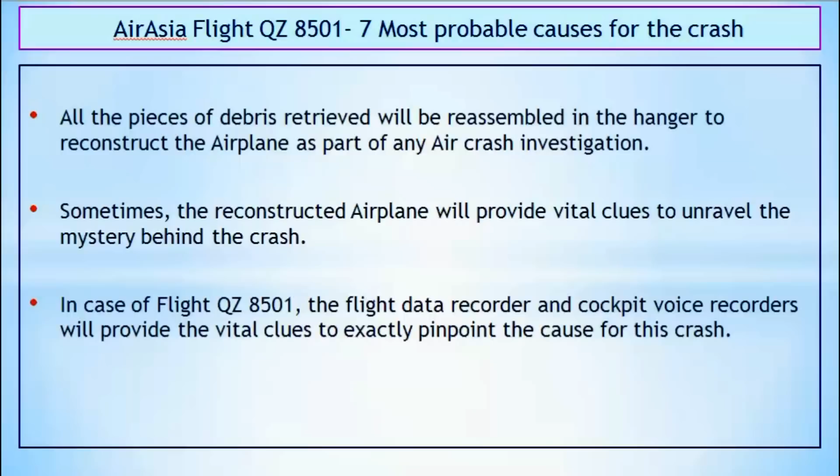All the pieces of debris retrieved will be reassembled in the hangar to reconstruct the airplane as part of any air crash investigation. Sometimes the reconstructed airplane provides vital clues to unravel the mystery behind the crash. In the case of Flight QZ8501, the flight data recorder and cockpit voice recorder will provide the vital clues to pinpoint the exact cause of this crash.

The cockpit voice recorder will tell investigators why the accident occurred, which words were spoken in the cockpit, and what problems they encountered. The flight data recorder will reveal how it all happened.

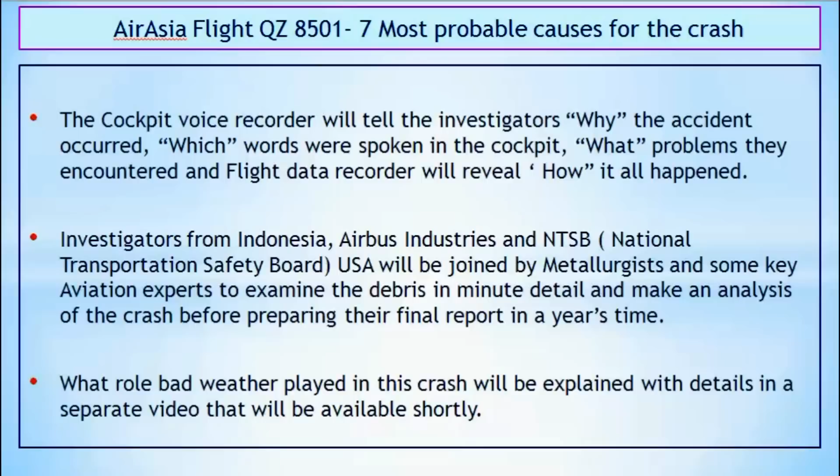Investigators from Indonesia, Airbus Industries, and the NTSB (National Transportation Safety Board, USA) will be joined by metallurgists and key aviation experts to examine the debris in minute detail and analyze the crash before preparing their final report within a year. What role bad weather played in this crash will be explained in detail in a separate video available shortly.

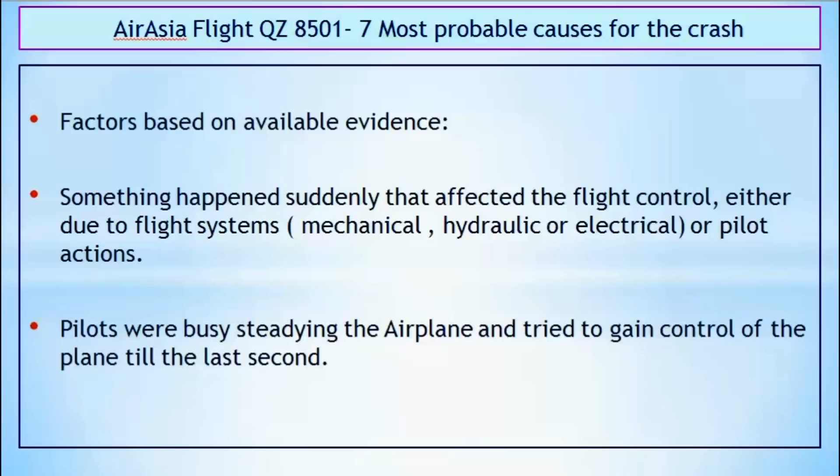Factors based on available evidence: something happened suddenly that affected flight control, either due to flight systems—mechanical, hydraulic, electrical, or electronics—or pilot actions. Pilots were busy steadying the airplane and tried to gain control of it till the last second.

This airplane definitely had not landed softly on water. Pilots did not have time to communicate a mayday call to ATC. The airplane had hit water with great force and broke into pieces. The captain was a very experienced pilot.

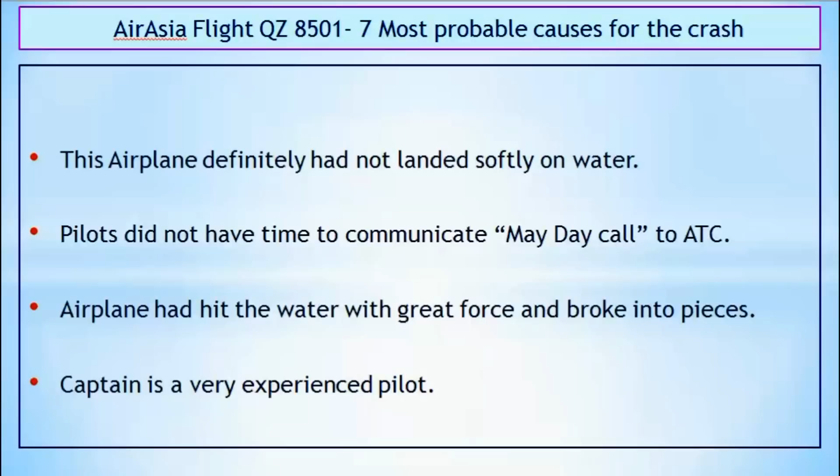Possible cause number 1: stall caused due to sudden climbing at a faster rate with a steep pitch angle to avoid thunderstorm clouds. This is the most likely cause.

If pilots push the controls to climb too fast with an angle of attack, or pitch angle, more than the maximum 15 degrees, the airflow on the wings decreases as it gets deflected, thereby reducing the lift force.

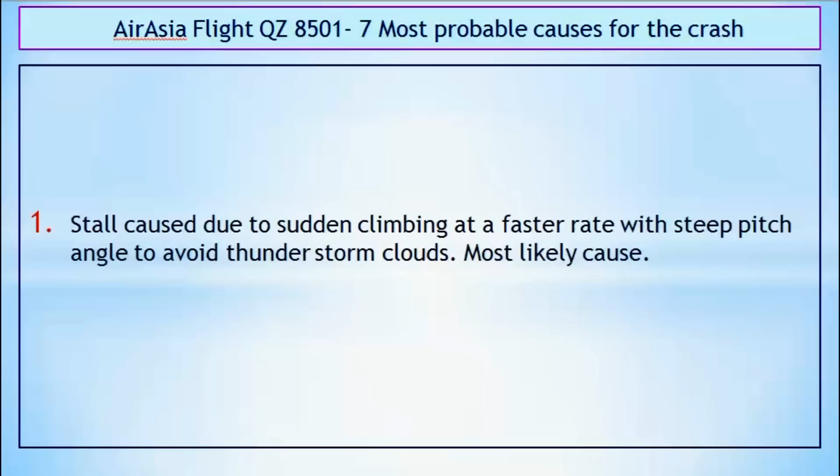If the airflow is kept below or up to a maximum of 15 degrees angle, the air flows and you get lift. But if it goes beyond 15 degrees and reaches 25 degrees, the air gets deflected and will not pass over the surface. The pressure difference will be less, and so the lift force will be less.

Drag and weight of the airplane will be equal when stall is approaching. If the aircraft continues to climb, the plane stalls and the huge weight of the plane pulls it towards earth. All modern aircraft are fitted with stall warning alarms, usually set 10 knots above the stall speed.

If pilots ignore the alarm and continue to climb, the airspeed goes below the minimum required stall speed, and the aircraft starts falling from the sky with increasing acceleration and will hit water with great force.

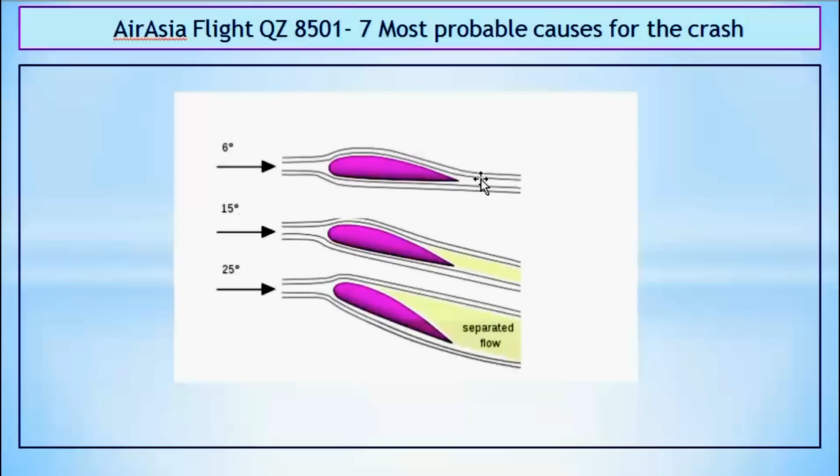Aerodynamic stall caused due to updraft of air currents. Warmer air rises, creating an updraft. This warmer air rises rapidly and becomes a very powerful force, creating high speed upward moving air currents in the thunderstorm.

Pilots consider thunderstorms as the worst thing on their flight path and usually avoid them by going around safely. Pilots of Flight QZ8501 requested a change in flight path before departure, but due to heavy traffic in that area, ATC did not approve a different route.

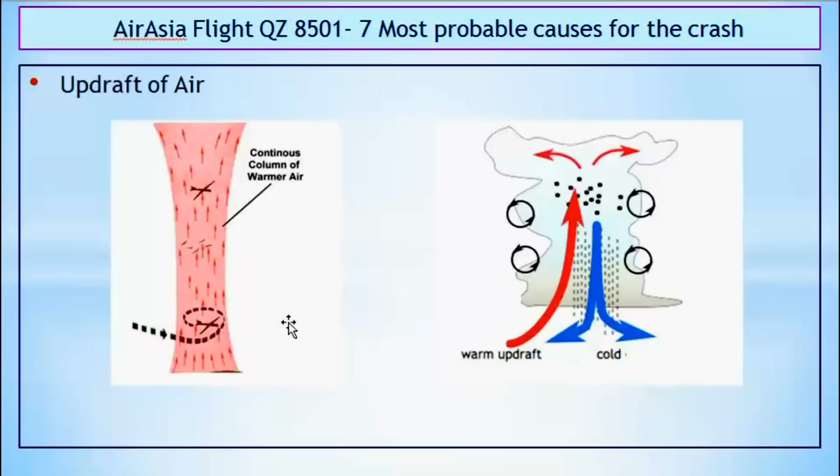An airplane caught in an updraft and immediately after in a downdraft can lose control quickly as speed and position of the airplane are upset. Airplanes fly normally as long as the airflow on the wings is not affected. In a severe thunderstorm, updraft air currents can reduce the airspeed suddenly, affecting control of flight, and the airplane stalls.

Aerodynamic stall caused due to icing and wrong airspeed display and pilot actions. A sensor covered with icing can give wrong instrument readings like airspeed and wind speed, and pilots may react based on those readings, which increases their problems.

When an airplane goes through dense storm clouds, pilots cannot see the ground to visually check and estimate the relative speed of the plane. If the plane is approaching stall speed, they cannot sense it due to thick clouds around them, and at that time the stall warning malfunctions.

Due to any reason, if the airplane experiences a stall and recovery is not possible, the weight of the plane will pull it down and the airplane falls from the sky. An example is Air France flight AF447, which crashed in the Atlantic in 2009 due to ice formation on the airspeed sensors, causing the aircraft to stall and crash. Pilots were not aware what was going on around them.

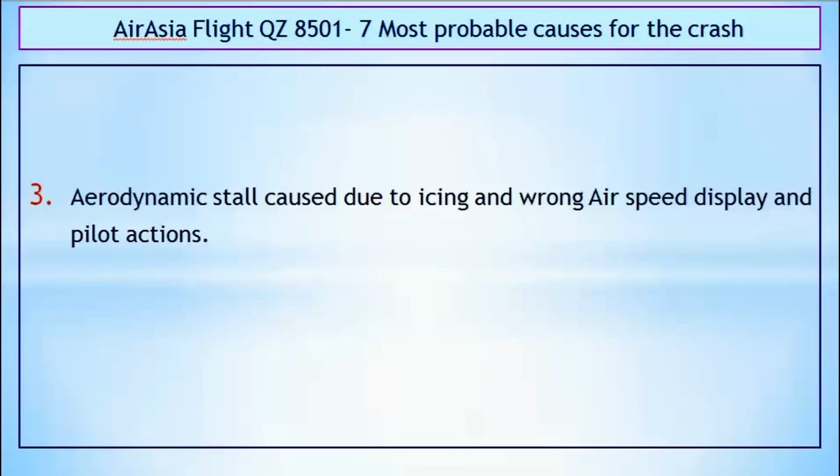You can observe that out of the 3 reasons we have checked so far, all of them indicate a stall. Only what would cause a stall, and under what situations the aircraft faces a stall, are different.

Damage of engines due to ice crystals and other forms of structural failure. Flight QZ8501 crashed from 32,000 feet within a matter of 6 to 8 minutes after experiencing a sudden problem. Even if both engines are damaged, most modern airplanes can glide for a soft landing, and pilots would have some time to alert the ATC with a mayday call.

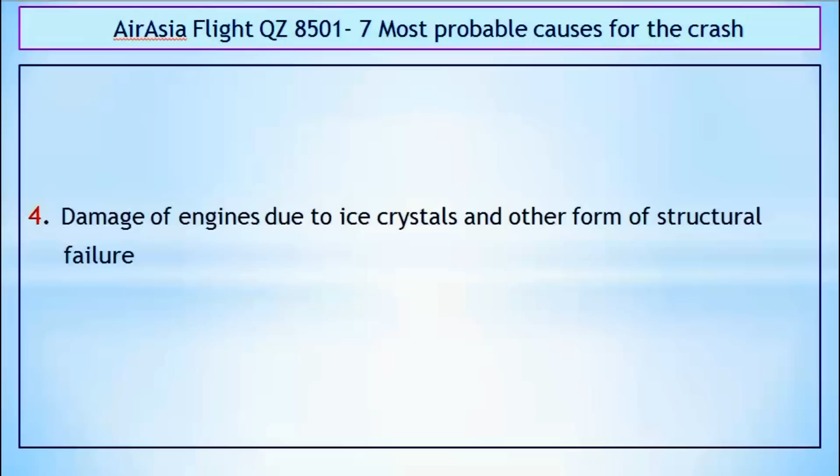If any control part like rudder, elevators, ailerons, flaps, or electronics housed in the wings get damaged, controlling the plane becomes very difficult and it will lead to a crash.

Number 5: Catastrophic failure of the aircraft structure at some place which results in damage to flight controls. If catastrophic failure of the aircraft structure occurs at some part of the plane due to thunderstorms and ice crystals, there is a possibility for the plane to lose control and fall from the sky. In the case of flight QZ8501, this may not have happened, although we cannot rule it out.

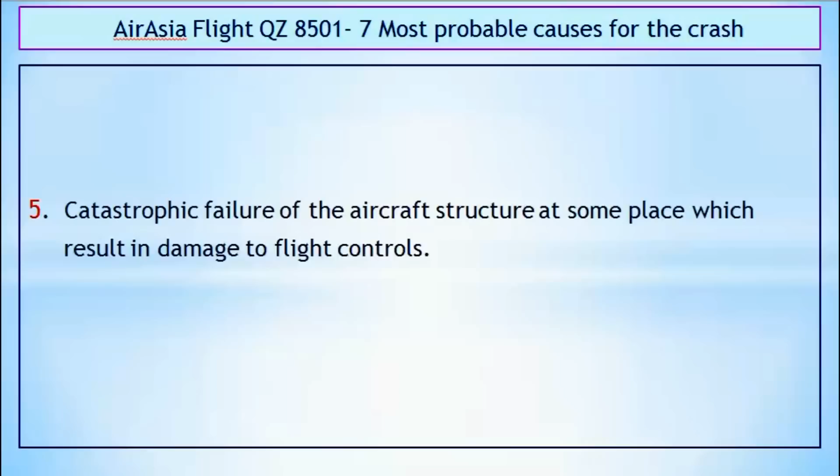The airplane was visible on radar for 8 to 10 minutes after the last contact from ATC, and the type of failure and extent of damage to the aircraft would be thoroughly investigated if structural failure is really the cause.

6. Thunderstorms damaging instruments and pilots facing instrument malfunction. If thunderstorms damage mechanical, electrical, or hydraulic systems due to ice crystals hitting the plane with huge force in dense thunderstorms, pilots face problems from engines, pitot tube blockage, flap malfunction, rudder and elevator malfunction, aileron malfunction, induction icing, and loss of oil pressure. Several alarms come alive all at once, pushing the pilots to their limits.

Under such situations, one wrong move by the pilots will increase their problems, and eventually the airplane will lose control very shortly afterwards.

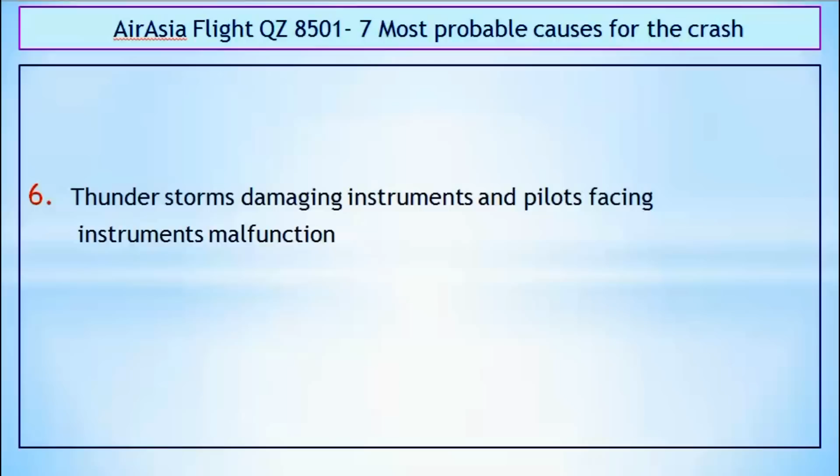Number 7. Sudden development of a micro crack due to heavy turbulence resulting in mechanical failure. Micro cracks in the structure develop due to various reasons, one of which is not following the maintenance schedules and strict procedures laid down by the aircraft manufacturers. The micro crack spreads slowly during service, and when the airplane passes through severe turbulence and dense thunderstorms, the micro crack quickly develops and leads to a severe problem.

Important conclusion: like any other aircraft accident, the cause is likely to be the result of a chain of events and conditions, the absence of any one of which would have avoided this tragic accident of flight QZ8501. A preliminary report about the crash will be out within a week's time, and the final report will take at least a year. I will also publish a separate video on how bad weather can play a role in air crashes.